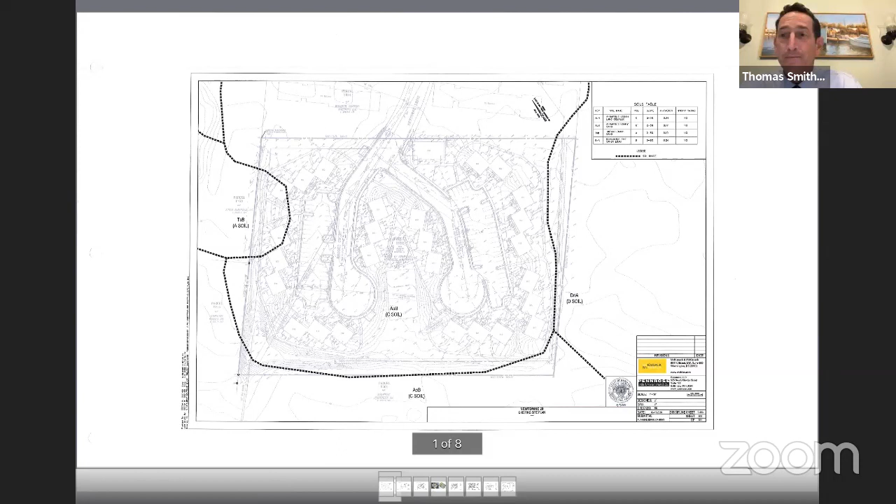This isn't the first time HACA has partnered with Pennrose. They've had very successful revitalization of public housing in the Clay Street neighborhood with the redevelopment of O'Berry Court and College Creek Terrace. I think anyone who's seen those developments would say it's an absolutely beautiful community. Can you zoom in, please? Is that helpful, Mr. Chairman? It does, thank you.

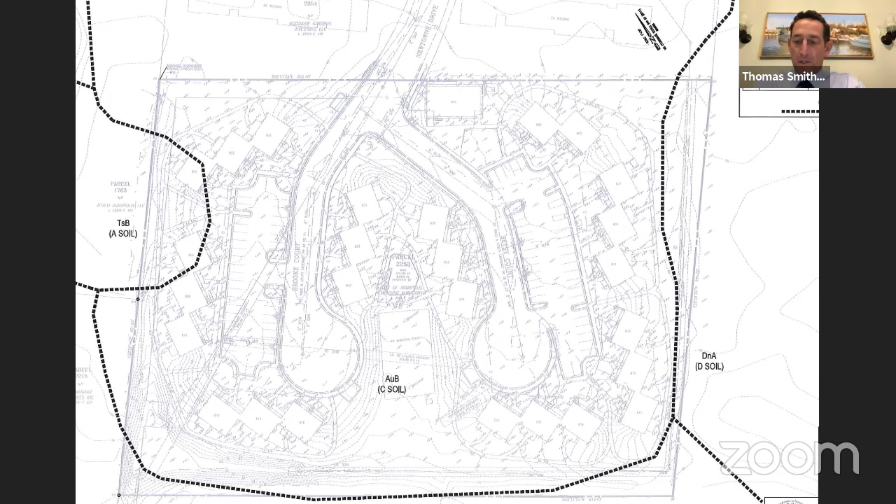So this project, Newtowne Drive, which comes in off of Forest Drive, is bisected into two courts, Brooke Court and Betsy Court. What is being proposed this evening, and this drawing I've pulled up here, overlays the proposed layout of the development on top of the existing development, so you can get a spatial relationship between existing and proposed on one plan.

What was really influential in the design of this plan was trying to create a sense of placemaking and establish a community identity as a singular identity. With the two cul-de-sacs, it's really been a bifurcated community, and the grade drops between the two cul-de-sacs an entire story. So the intent was to unify the community on a single grade with the community center proposed at the beginning of the loop road, at the end of Newtowne Drive, which works to call a sense of invitation into the community and centrally locate the communal elements of the project.

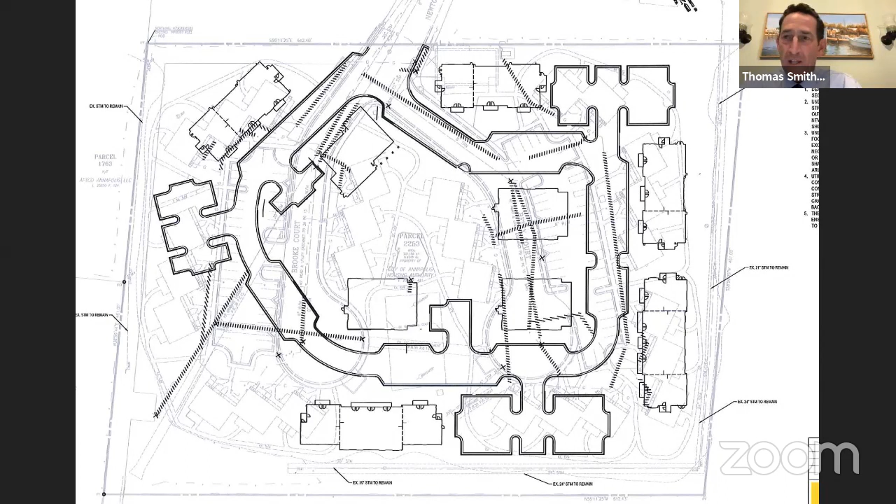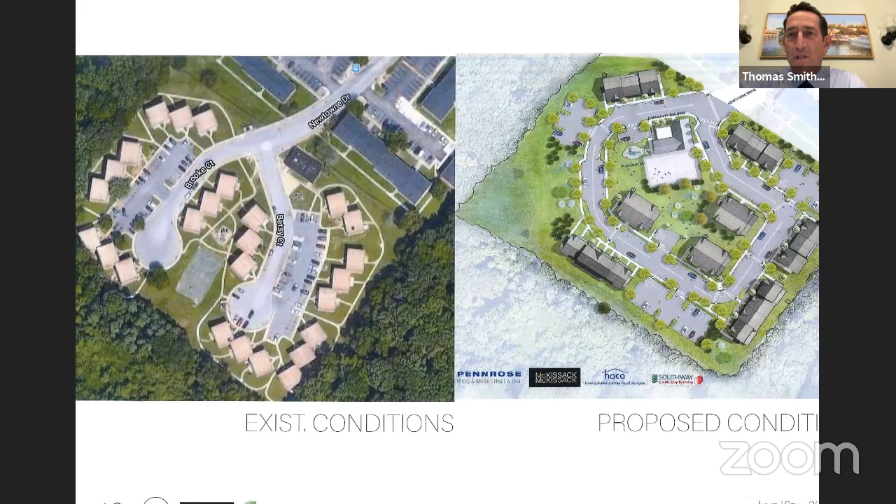I'm going to attempt to, I don't blow up too much. So this image here shows the existing development on the left and the proposed development on the right - an existing aerial photograph of the project and a colored rendering of the project. So you can get an idea of what I mean by an existing bifurcated community versus trying to establish one unified community. I think this image on the right certainly shows that.

From a preliminary record plat standpoint, to reiterate, there's 6.45 acres in this project. 0.656 acres will be dedicated to public right-of-way, which leaves the remaining 5.79 acres in ownership by HACA, and the existing right-of-ways of Brooke Court and Betsy Court will be vacated by the City Council.

This is perhaps the most vanilla, most simple plan development request that the Commission will probably have before it. And so there's one item that I think is unique to this - otherwise it's a very straightforward plan development application - and that is the alternative parking standards.

At the request of the Planning Commission during the work session, there was a desire on behalf of the Commission to see if we, staff and the applicant, could eliminate some of the parking spaces on site. The applicant has provided an alternative parking needs study that shows today there are 78 parking spaces for the 78 units at a ratio of 1:1. The city code requires a ratio of 1.5 to 1, which would total 117 spaces. The applicant was able to look at the site plan since the work session and eliminate 17 of those spaces, proposing an alternative of 100 spaces for a ratio of 1.29 to 1. That's actually a 28% increase over the existing number of parking spaces. In their alternative parking needs study, as I'm sure the Commission read, the bedroom types change from the current 1, 2, and 3 bedroom units to predominantly 1 and 2 bedroom units, and that should help with the alternative parking standard.

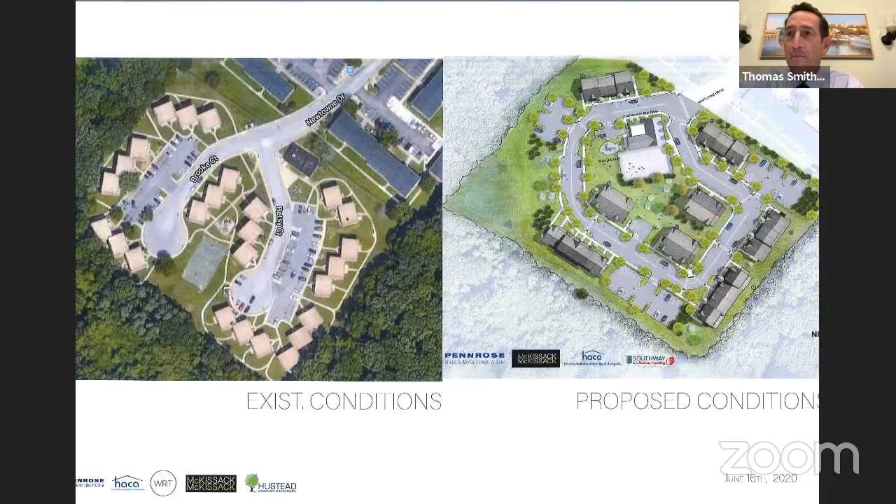I'm going to stop sharing now. I will turn over the rest of the presentation to the applicant and their consultants, and then come back and give the staff's recommendation, if that's okay, Mr. Chairman.

Hey Tom, while you're there, I have a quick question. The 55 street trees that equate to 1.59 acres of mature tree canopy - do you know where that guidance comes from? I was looking at the Maryland FCA technical manual and didn't see that kind of guidance, so I'm wondering where you got that.

Yes ma'am, it does have its basis in state law. About a year after the state law was adopted in '91, the state recognized difficulty for urban municipalities to establish forest, so the law allows credit for street trees in mature canopy. They use a manual by Penn State University called Street Tree Fact Sheets, which lists all large trees and 30% of their mature canopy area. In this case they've chosen Platanus acerifolia, a plane tree also known as sycamore, which has a mature canopy of just over 1,200 square feet per tree. As staff, we urged the applicant to look at street trees first in reforestation, even though it's perhaps the most expensive form - you get the most shade, the most bang for the buck.

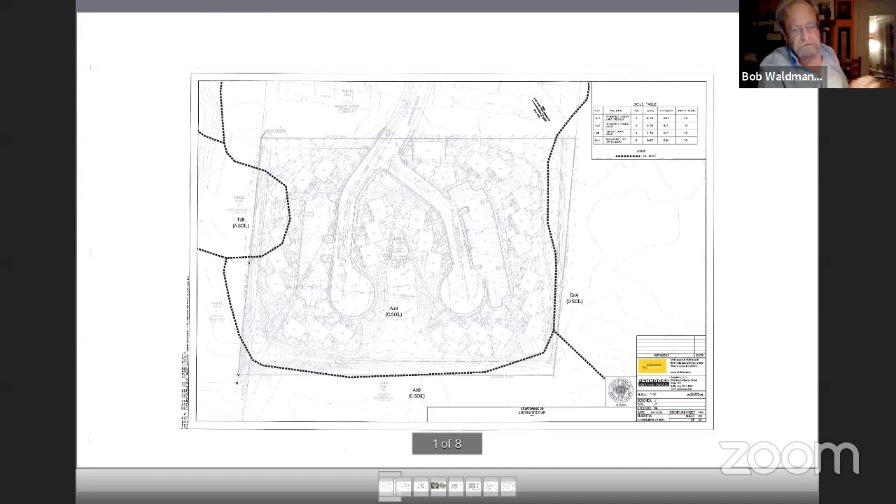Good evening. I want to begin by saying to you and everybody here, including our city staff, this is a really commendable project, and the way it has gone about is noteworthy, laudable. One theme I caught is that you listened to people from the very beginning, and I wish more people in this world would listen to each other, because I think you've presented to us a really good plan. But I have a reservation, which I consider important. The good parts of this plan have been said over and over, Mr. Hyatt, thank you, but they really are good. In comparison to what was there before, they're miles ahead. I can't come up with metaphors that fit how much better this is than what was before. But I do have something I'd like to point out.

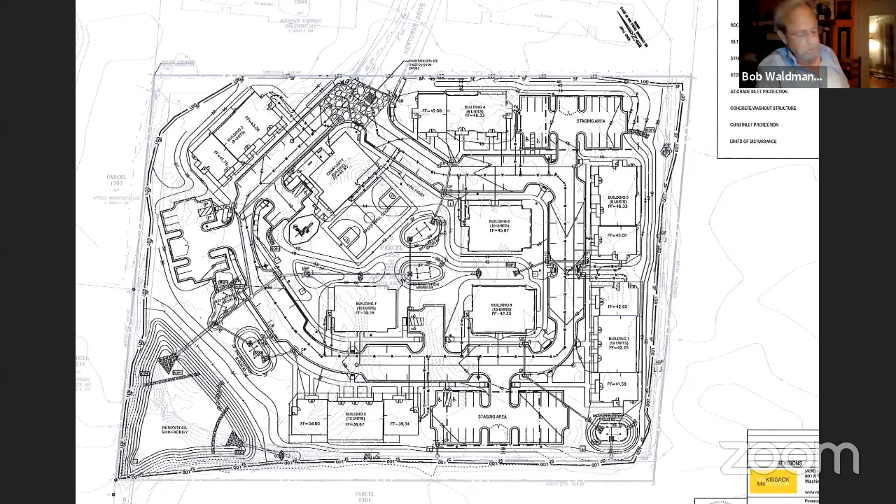I'd like to draw your attention to the community center. To the left of it there's a small parking lot for 4 cars, which abuts the tot lot playground and the community center. Behind the playground there seems to be a fairly open field, and as far as I can tell there are no bioretention facilities there, just an open field. So over there, in addition to the basketball court, we have the recreational facilities that people said they need. I agree with them.

The 4-car parking space, I have a real question about. If it weren't there, you'd be able to put in a larger tot lot, or perhaps a gazebo or an outdoor picnic shed, simple construction and not expensive, but adding to the signature identity and usefulness of that central space. The 4-car parking space denies us that possibility. It has an entryway and a turnaround space in the middle, so it's a fair amount of surface area devoted to just 4 cars.

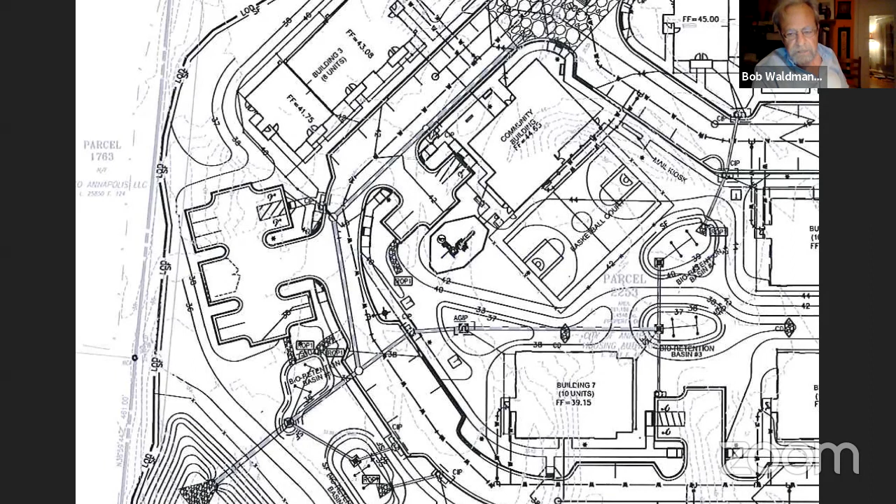And if I look across the street, I see a parking lot — I suppose that's the northeast corner parking lot mentioned by your experts. It looks to me like one could add on the southern side of that parking lot 2 spaces, if not 4. And perhaps on the street, one could add 2 parallel parking spaces, at no loss to anything else.

But what the gain would be is it would be tremendous, because you would have this wonderful community area, and now you would have more room for recreational space. One might even consider moving the tot lot up maybe 20 feet. Then next to the end of the basketball court, there's a very small, but usable Frisbee field, small soccer practice area, a little touch football kind of thing. We can't do that because of the 4-car parking spaces.

So what I'm asking you to consider between now and the time we come back for a final vote is: consider with your folks how we move those 4 cars to someplace else. I think your management needs them, your visitors need them, people need a place to park close to the community center and management offices. I get that. But you could put in, where there's a bump out to the left on the main road, 1 or 2 parallel parking spaces that are handicapped or whatever you need.

I'm just saying those 4 spaces, if moved, would have great advantage. I don't know that we need a reply tonight, I'll give you time to consider. What I am asking is that you consider it, because I think it would really add something here. It would add an aspect of space and pleasure and dignity to what is clearly a superb plan, given the constraints you've had to work with.

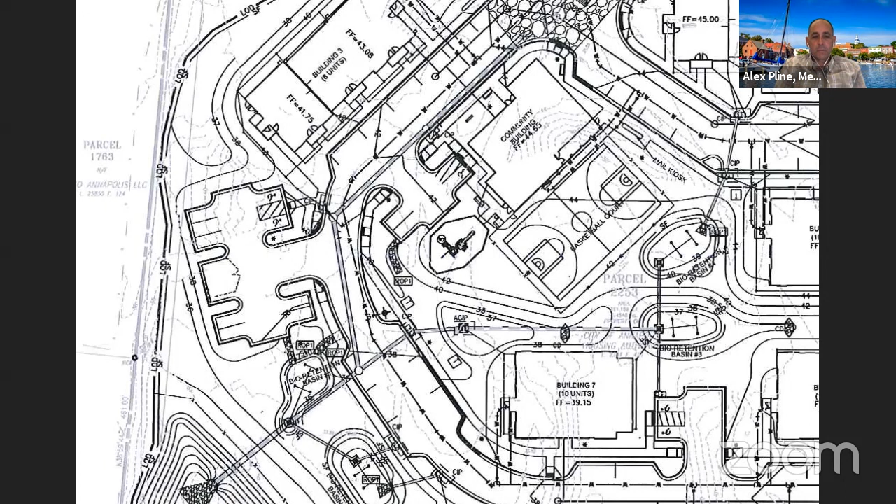That space, I hear you, and I don't even know if it's 4 spaces. I think the space next to it is more like a ramp or something else. Is that even a space next to the handicap space? Yeah, typically the accessible ones are a spot plus an accessible area to get a ramp out of a van.

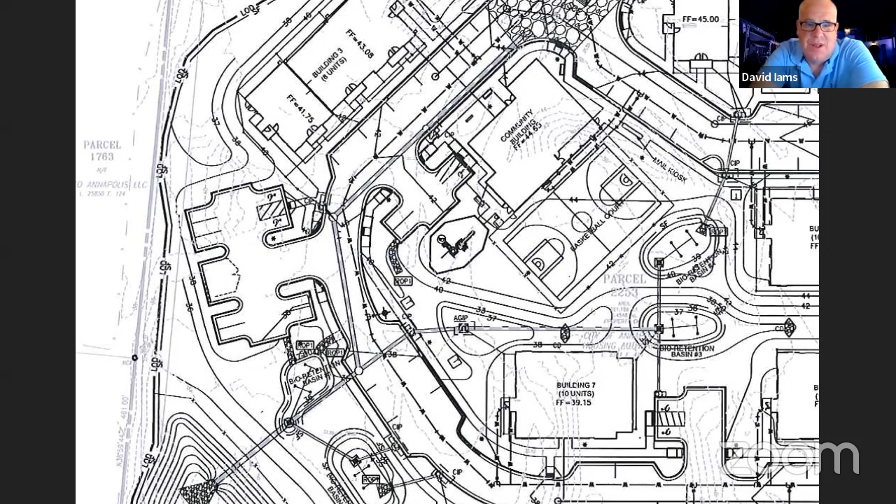So there's only 3 car spaces we're really talking about. And I do see that people need to be able to access the tot lot easily without walking too far. It's nicer to have that. But I understand what you're saying, Mr. Waldman, I'm just not 100% sure if it's that. I'd like to see if there's a solution, because it's valuable space to gain for open space and usefulness. Okay, that's all. I'm putting it out there for you.

I have nothing further, I guess I'm the chair. Does anybody else have anything further? No, I'm back. So, but that works great. Keep going, you're on a roll.

I'd like to make one comment. There's so much to like here, we don't have to go over all of it, but I want to commend you on one thing: actually using real thought behind the alternative parking standards instead of just following the junk science behind our minimum parking requirements. You did reasonable analysis, talked to people, got data, and made a decision for what would work in that context rather than just pushing the standard junk science. I want to commend you for thinking about that thoughtfully.

Thank you. Yeah, all right. I suppose we shouldn't take up too much more time, because the poor lawyer for the next applicant is probably quaking in his boots. That's funny, I read into your comment there.

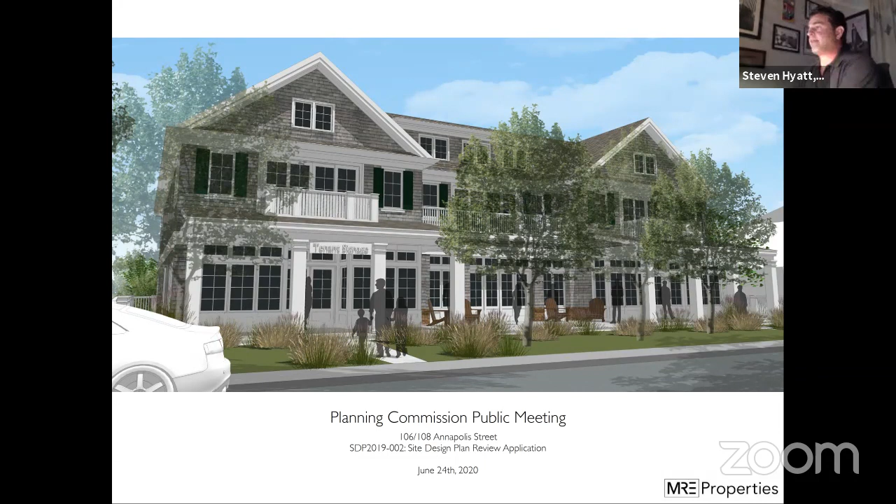Okay, well, not hearing from Mr. Iams, I'll next call... Mr. - I'm sorry, David, I am here, Stephen. I am here. David, sorry about that. Yeah, that's okay. Well, listen, I will be relatively brief here.

My name is Dave Iams, and I'm the founder and principal of MRE Properties. I just wanted to say I appreciate the opportunity to address the commission. As this chart will identify, MRE Properties actually owns a number of buildings in the West Annapolis area. From a quick history perspective, I live in West Annapolis, so I've lived there for approximately 10 years.

My daughter lives in West Annapolis. I work in West Annapolis at 706 Giddings Avenue, and my wife just opened a retail store called Revival in West Annapolis. So I am very much a part of this community. I am not a professional real estate developer - my primary profession is I'm the CEO of a global advertising agency.

And this is really a passion project for me. I've been blessed in my life to be relatively successful, and I'd like to see West Annapolis particularly be a more vibrant village to support its local community, as I think it was originally envisioned and originally designed.

West Annapolis has some phenomenal assets. Its location is fantastic, its access to the water is fantastic, its elementary school is fantastic. The structure of the community and the sidewalks make it a really livable community. The Growl Center is fantastic.

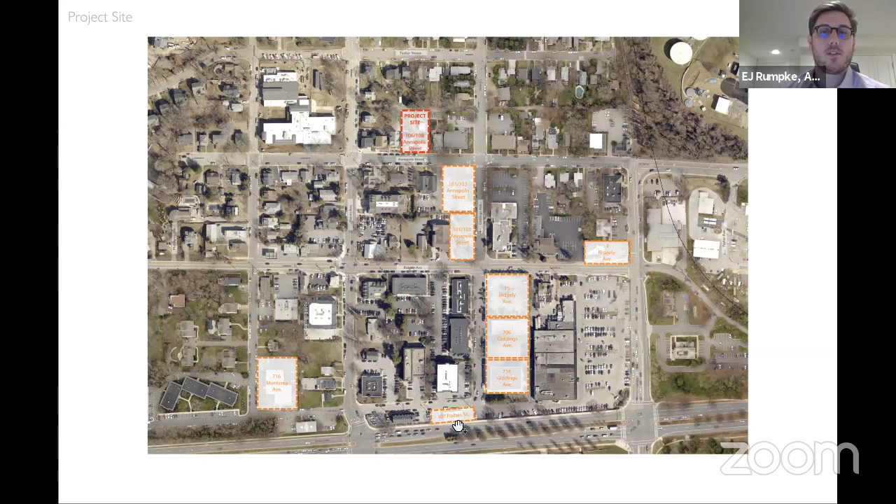That's a gateway building to the city of Annapolis that we're really excited about.

We also have the redevelopment of the old PNC Bank that's right next to the Growl Center at 4 Ridgely. We're going to have a coffee shop and juice bar that opens up there, hopefully later this summer or early fall. That tenant will be a group called Rutabaga, who currently has a location on Annapolis Street, and they're moving over here to take advantage of the drive-through.

In the middle of this page, you'll see we have 3 parcels that we've acquired, all next to each other. We're in the process of planning the redevelopment of these properties as well. Those projects will also involve a major site design that we'll hopefully be presenting to you in the next couple months, so hopefully later this summer we'll be talking about those projects.

And then tonight, we're here to talk about 106, 108 Annapolis Street, which is what you see at the top of the screen right here. Can you go to the next slide, Andrew?

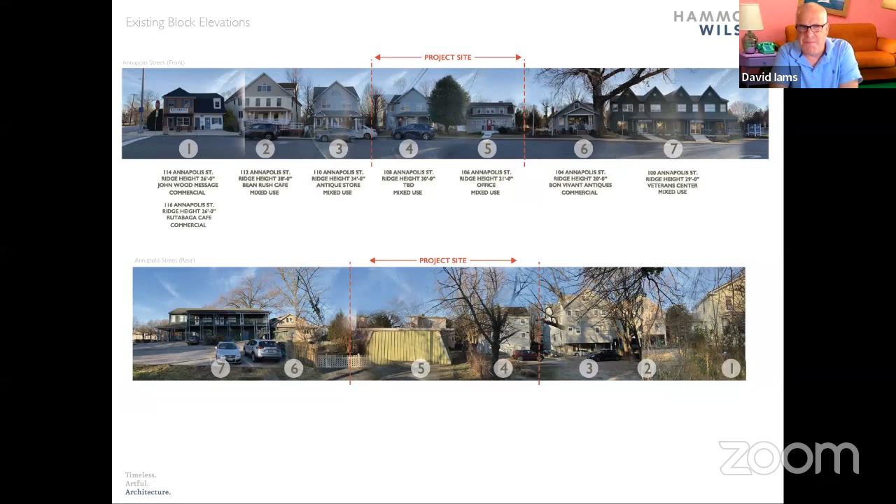10:30 is my limit. I'm just trying to get a better idea of where this is exactly, because I know you've got Rutabaga on the corner and Bean Rush Cafe, and the next building would be 112, right? It looks like it's 4 or 5. When I look at the first couple of charts you have, it's the 3rd and 4th building. So I'm not sure, is it the 4th and 5th building or the 3rd and 4th building? On your site location, you have it like the 3rd and 4th building, so I just wanted to be sure.

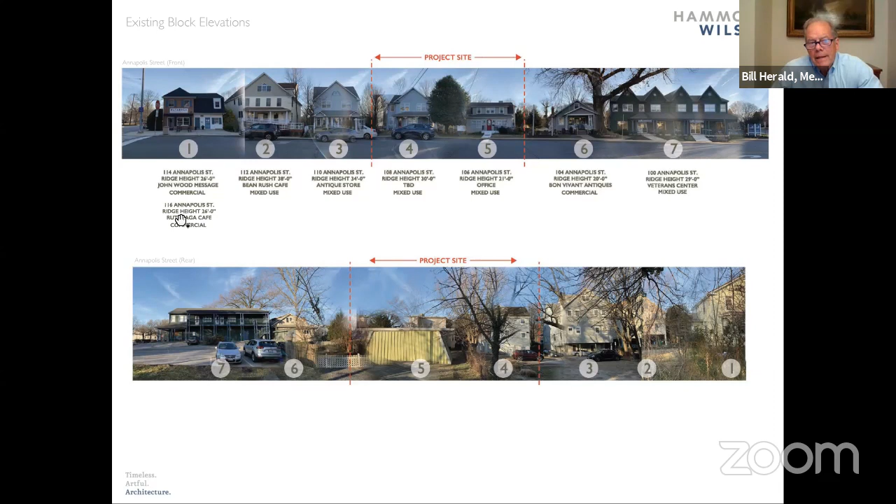It's between the two antique shops, David. It's between Annapolis Antiques and Bon Vivant. Okay, because when I look at the site location, it looked like it was including the first antique shop. No, it doesn't. They did buy apparently some right of way there, but I believe the source of the confusion is on the corner, number 1. I believe that is actually 2 addresses, and so that may be why. If you go back a couple slides, you'll see what I'm talking about.

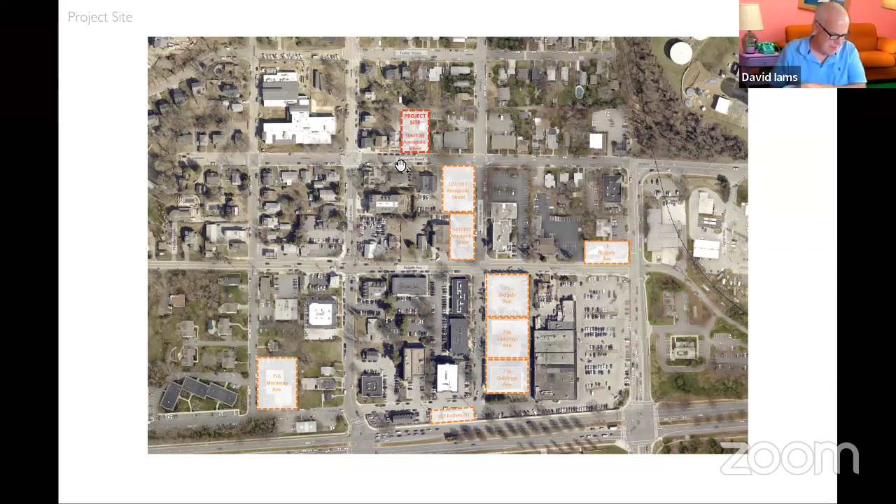What I'm talking about is here. I'm showing 1, 2, 3, see, and then 4, 5. Go back a little further. And it was showing up. Sorry, not there, the big overall site location one, which I believe is that one. It's not that one, it's the one in my package. It's showing the second. Well, we know what the right one is. How about we proceed? I want to make sure it's so, and when you find it, we'll come back and correct it.

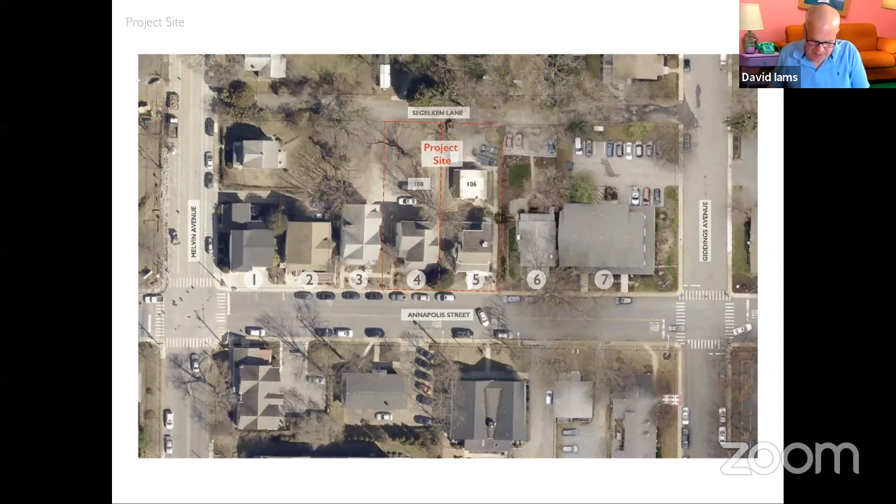Yeah, okay, it's 4 and 5. So you good with that? 5, okay, it's not 3 and 4. Let's roll. Great, thanks for that catch though, Dave, appreciate it. Sure, I just want to be sure.

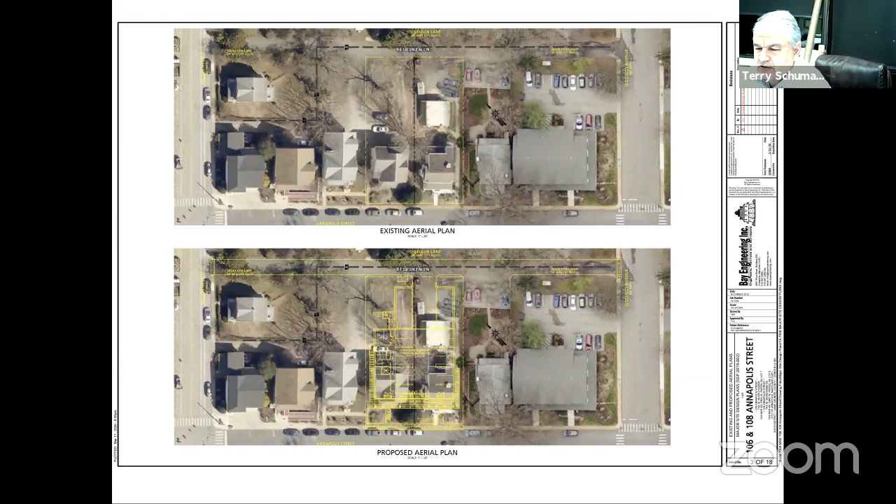Yeah, just a couple things on this. So this picture here represents an existing aerial plan, and below it is a proposed aerial plan where we just dropped in the site layout over top of it. I'll speak more about the existing aerial plan. So the site is the areas that are bordered by the yellow. There are 2 lots. The total width of the property is 100 feet, and it goes back 150 feet for a total of 15,000 square feet, or 3/10 of an acre.

This site is completely within the critical area, the Chesapeake Bay critical area. It's got a designation of intensely developed area, or IDA. The actual border of it is just to the east, if north is the top of the page, so really the limit of that critical area is nearby, but our site is completely within it.

As indicated before, the zoning is B1 convenience shopping district. You can see on this existing plan there's a heavy black line that goes along Segelken and then cuts in. That's the zoning district line, so we're all B1 south of that line. Then the R1 district, the residential district, is on the north side.

It's an unusual site. It's got Segelken Lane that interconnects Melvin Avenue with Giddings Avenue. Segelken is a 20-foot right of way. It's a city street and an alley, if you will, that serves pretty much the parking and the uses behind these buildings that all front on Annapolis Street.

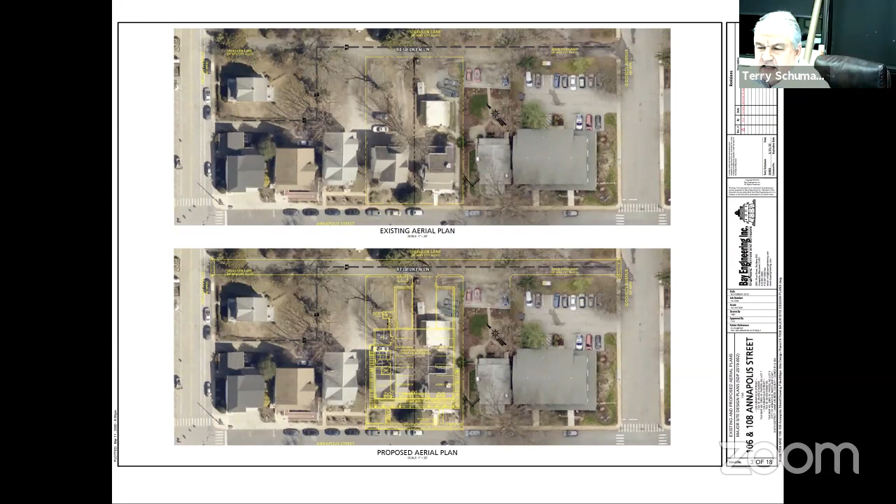Let's go to the next slide. I'll talk more about the proposed plan here. This is our site plan submitted with our site development package. The orange represents the building, and underneath you can see the parking below it, the trash room, the mechanical rooms on the lower level, and then the porch, which represents the Annapolis Street side. There'll be a porch on the upper level, or first floor, and in the back the orange is the structure and the porch.

The lighter gray represents a paved area, which will be asphalt paving. The darker gray with shading is the permeable pavement areas, those 5 spaces and then 4 spaces. We have bike racks in the front and the back, and also one up along Annapolis Street. We'll be widening the sidewalk along Annapolis Street to 5 feet wide, currently it's a little below 4 feet. In the back on Segelken Lane, that's the gravel symbol, basically a dirt gravel lane. I'll get into that more on a subsequent slide.

The blue represents our stormwater management, our microbioretention areas. This site has 3 microbioretention areas and permeable pavement, and I'll get into that in a second. It's served by public water and sewer. Public water is up along Annapolis Street, and the sewer runs back there on Segelken Lane. All the residential units along Segelken Lane have their front on Tucker Street, and the rear entries have access out to Segelken Lane, so they're kind of the same as us, double fronted on these access roads.

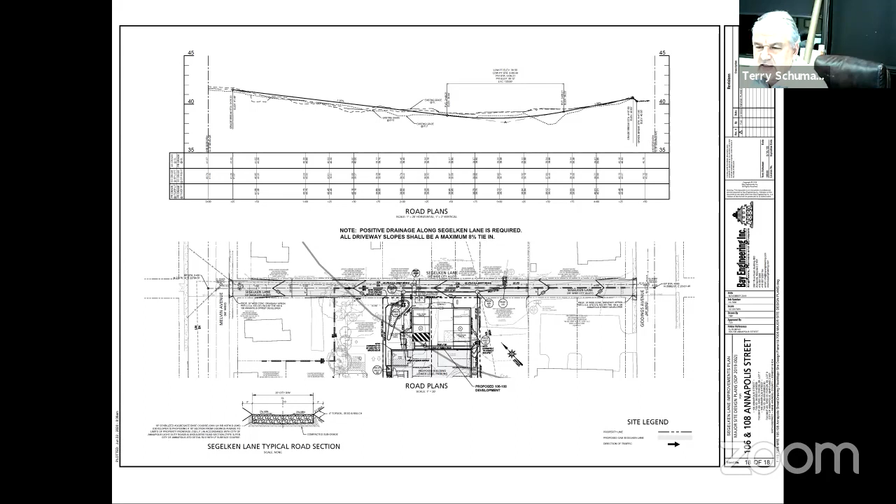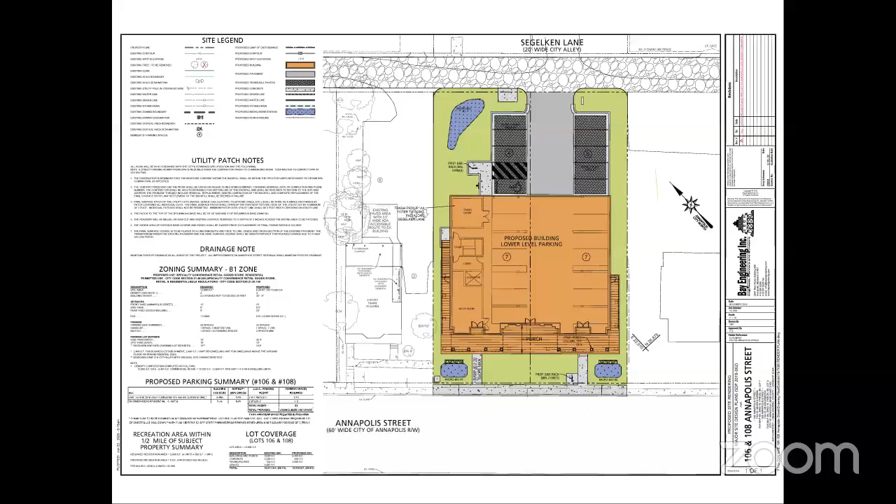Why is that central lane asphalt and not permeable? Because it's tough with permeable pavement - when you do those turning movements, backing a car in and turning the wheels, it eats up that surface and creates ruts. It's just tough on the permeable pavement, so typically we don't do it in the drive aisles.

Stephen, I think I'm done with the presentation as far as that goes. I know you have a series of questions. Yep, thank you - we can run through those pretty quick, I think.

Would there be any more presenters after this if we had extended time, or is that it with Terry? No, we have 3 more witnesses. Okay, I think in light of the time, I wouldn't go into another presenter, but I'd leave it for some commissioners to ask questions in the next 5 minutes, then we'll end it.

So there would be some feedback at the moment to start off with, starting with any commissioners who want to make a comment. Well, Terry, I have a quick question.

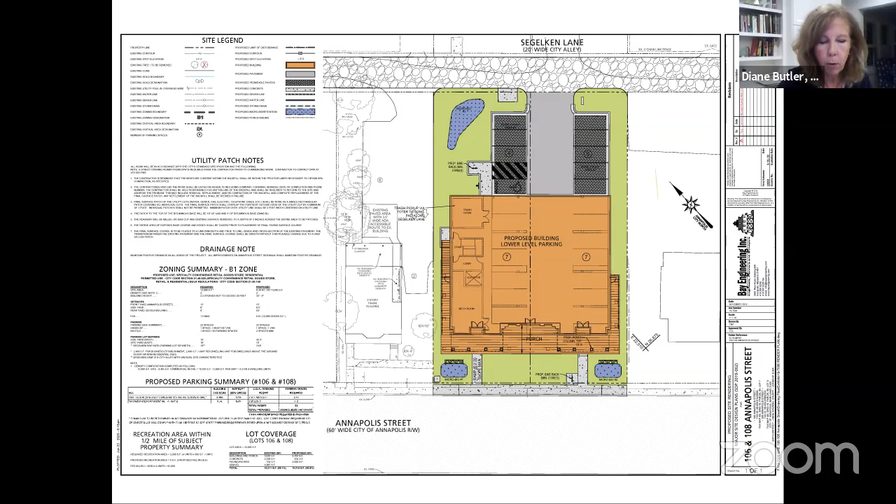Can you tell me what the existing impervious surface square footage is and what the proposed square footage would be? So the existing square footage we actually decreased a little bit - it was 10,211, or 68.1%. Our proposed square footage is 10,014, or 66.8%. So we're basically reducing the impervious surface by about 200 square feet.

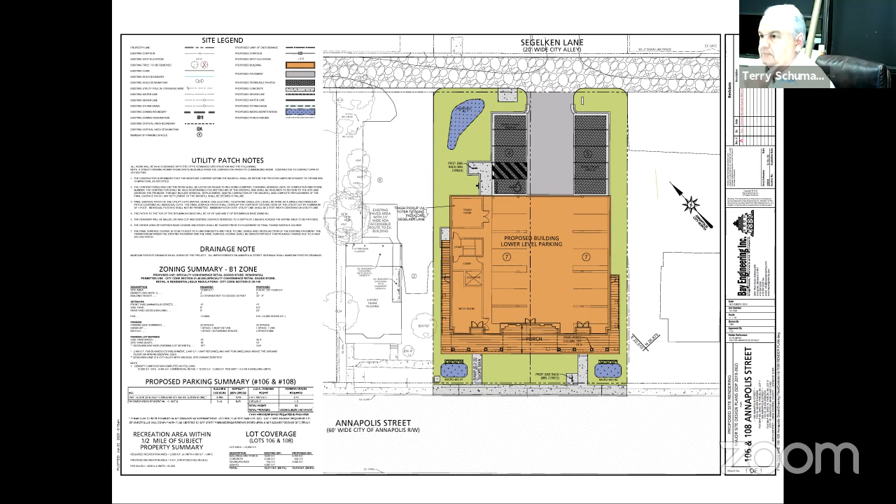Any other questions from the commissioners at the moment? Okay, being that we have about 2 minutes left of what we agreed to, let's go ahead and end, or pause, the presentation for the West Annapolis project at the moment. We will continue this presentation by the applicant at our next meeting, which is on Thursday of next week.

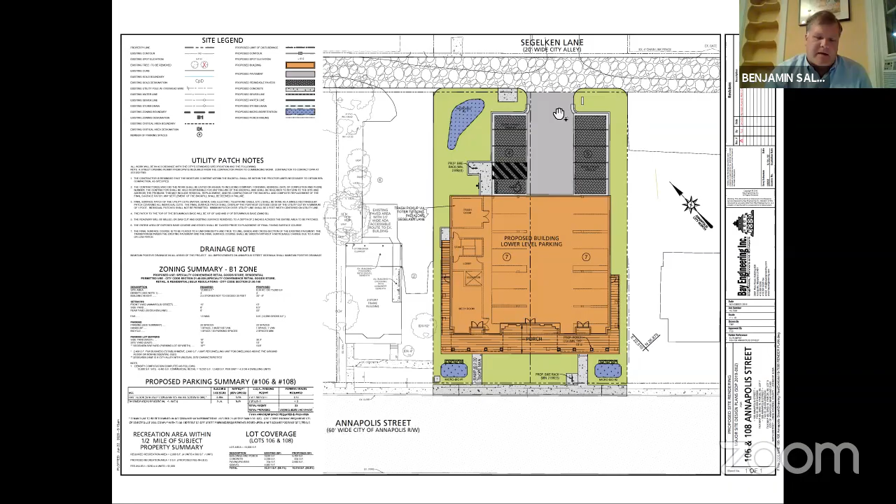Being that said, then there would need to be time for public comment. And so we would probably need to extend the case open till the following meeting. We do have 2 meetings set aside in the month of July, so it would mean that the second meeting in July the applicant's package would get continued to.

I don't see online anyone from Planning Zoning Department that could corroborate that story. But Mr. Smith, do you have any comments or issue with that? Because that seems to me to make the most sense, because I don't see how we could successfully get public comment in time and finish this in a week. That just doesn't make sense to me, or being fair to the public.

I would concur, Mr. Chairman, and we also have some projects for July 22nd that we'd like to schedule for public hearing that evening as well.

All right, Ms. Rouse has polled the commission to see if we have a quorum. So please make sure you reply to Ms. Rouse, and I'll be there. I think we will have a quorum. I've talked to some others, so yes, this project will stop. Based on that, we'll stop the presentation at this point and continue the presentation on Thursday of next week.

You will have the priority of presentations next week, and then we will continue public comment open until the July 22nd meeting, because we do need to give the public adequate time to comment on this. One week just wouldn't have made sense from the get-go.